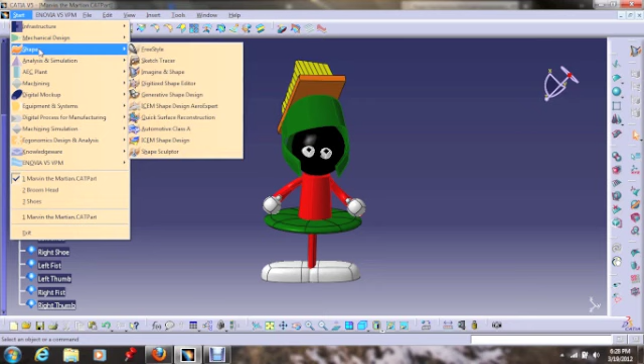We're going to start by first modeling the torso. So we're going to open a new Imagine and Shape workbench under Shape, then Imagine and Shape. We're going to call this the torso because that's what we're going to start with first.

Now Marvin's torso we're going to model as a tapered cylinder. We can do that by first inserting a cylinder, which is found under the Sphere toolbench, and it's the second option.

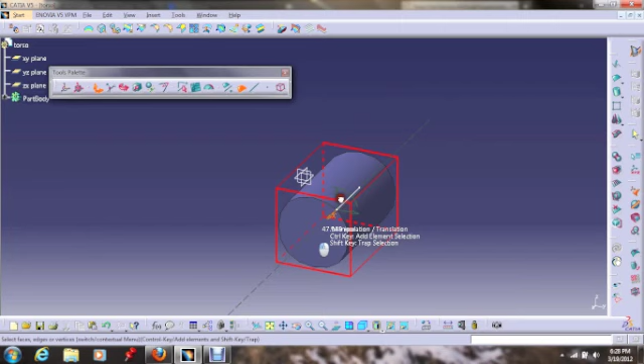Now when CATIA adds something, it automatically selects all the surfaces for us, so we can translate it by simply clicking on the axis, moving it left and right, forward and back, and even up and down. We can also do this with just one plane as well by clicking on the plane tool, double-clicking on which plane we want to move, and we can move it this way as well.

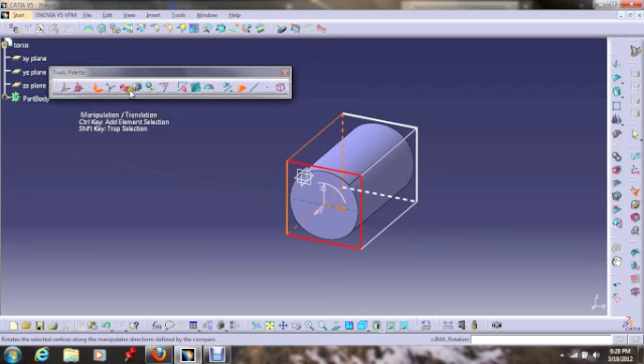We're going to leave it in its cylindrical shape. We're going to rotate it first. As you can see, I never selected all the surfaces, so we're just going to end up rotating that plane. However, if we go back and click this toolbar, it now has everything selected for us, and we can rotate the entire cylinder.

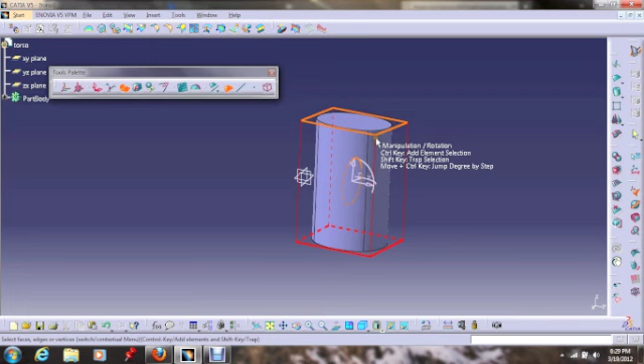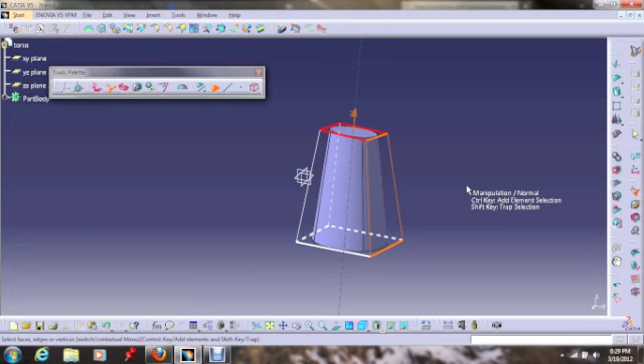We want to make it tapered, so we're going to click the local normals button, double click the top, and if we pull it up, it's going to open up the top face, and it'll close it up if we pull the z-axis down. So we want to make it just slightly tapered.

So about there's fine. We're going to click the spacebar in order to get out of this tool bench. Next, we are going to subdivide the top face, so make different surfaces which we can work with. To do that, we are going to click the face subdivision toolbox, which is the sphere with just the red outline box.

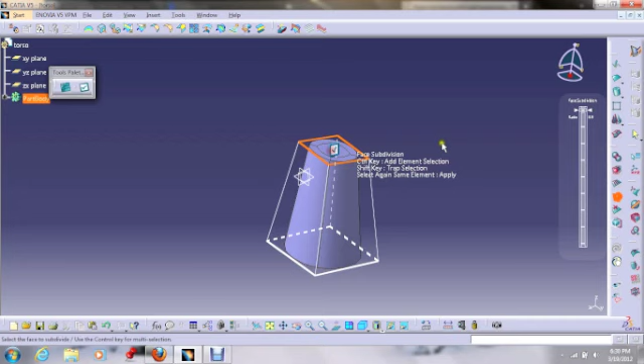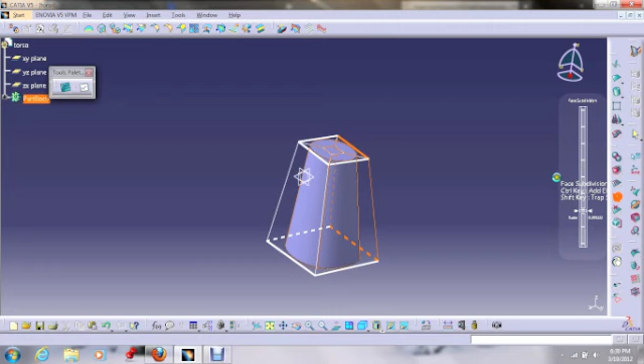Now we click the top face, and with the slider right here, if we slide it all the way down to the bottom, we have a very small face. If we slide it up to the top, we have a larger face. We want something right at about 1/4. Click the check mark to accept. If you don't click the check mark, you won't accept the changes that are made. Click the spacebar twice to get out.

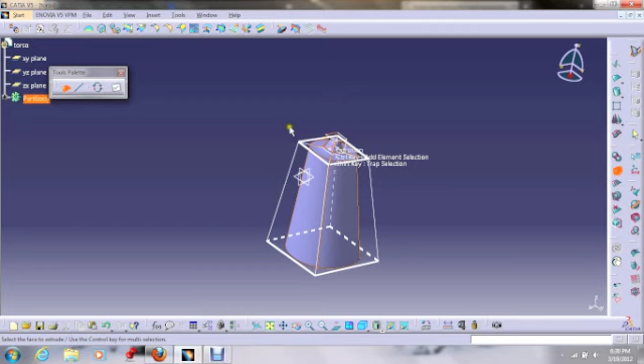Next, we are going to extrude his neck so we have something which the head can sit on. To do that, we are going to click the extrusion toolbar. Click the top face and click the inner surface which we want to pull up. Click the check mark to accept. Spacebar to get out of it.

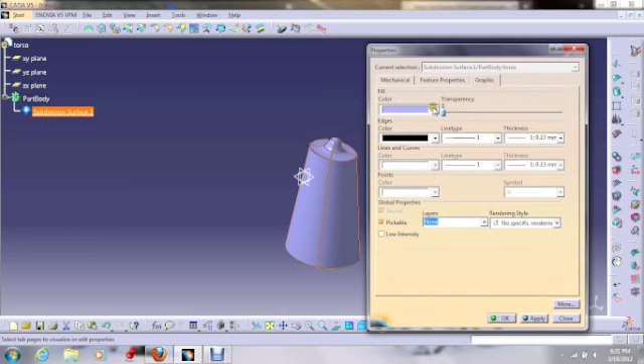Now if you open up your tree, Subdivision Surface 1 isn't very descriptive. So we're going to rename it, right click, Properties. We're going to call this the torso. If we go under Graphic, we can change its color. Since Marvin wears a red shirt, we're going to change the color and the edges to red. Apply, OK, and there we go.

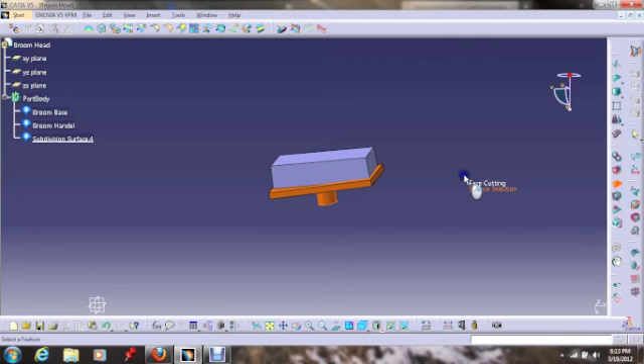We have the torso. Alright, so now we're going to model his broom head, starting from what we have here. Mostly just going to modify this gray block. So the bristles on top are obviously not a solid block.

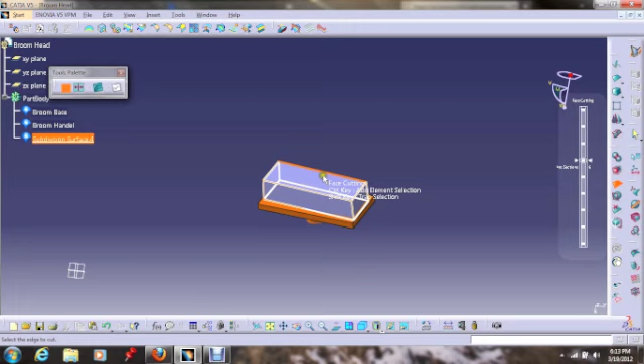So starting with this, we're going to click this tool over here, which was the face cutting tool, and then click the block, moving it around a little bit till we see the top face. You come over here and we're going to have it cut into 6 sections, and if we click along this edge, it will cut it along that edge, and click the check mark to accept.

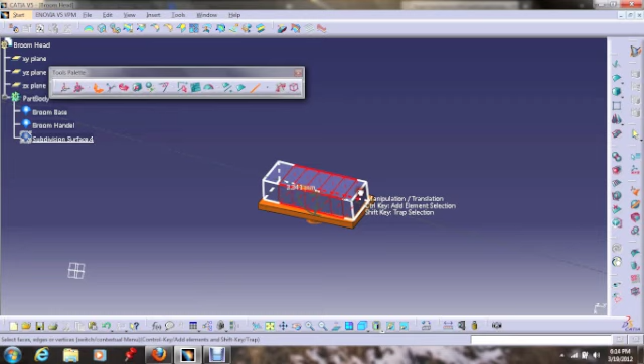Now we're going to hit the space bar once to get back into the normal tools palette. We'll click the line tool and translate these individual lines up and down, offsetting them to form the bristles. So we click every other line, then use the Z-axis, and you get a nice jagged edge.

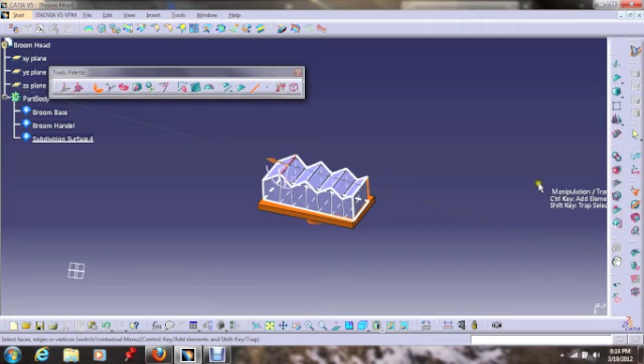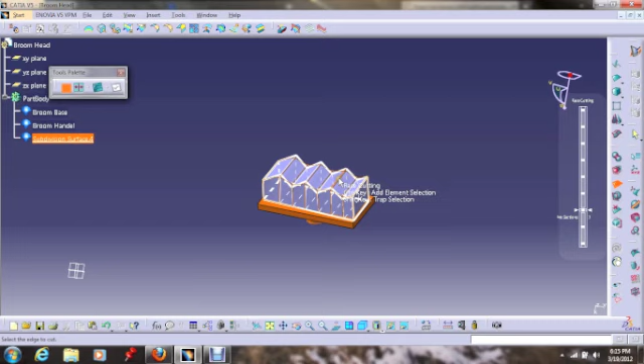You can also do it in the other direction. Come back over to the face cutting tool, click it, and choose sections again — maybe fewer this time, say 3 sections, to see it more easily. If you click a different edge than last time, a perpendicular one, it will cut in the perpendicular direction. Then click the check mark again, hit the space bar, and do the same thing.

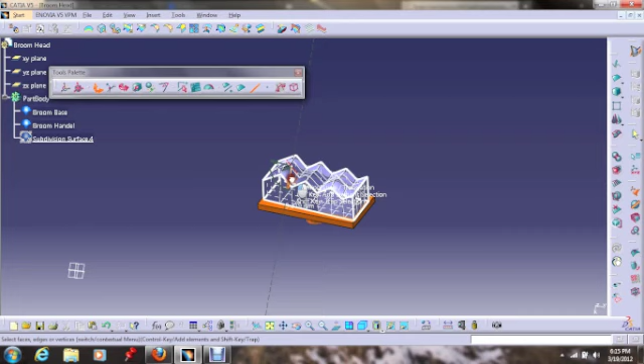Now we can translate each of these other lines individually, and eventually you get a perfectly imperfect section for the bristles. Hit the space bar only once, and we're going to come over here and rename and color the bristles — over to feature properties.

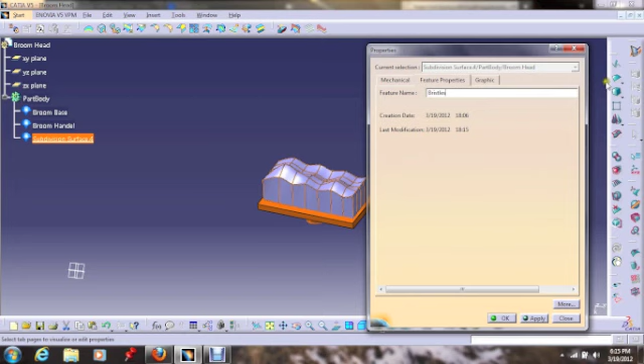Hopefully I spelled that right — probably not. We'll set it into graphic and make them yellow, and leave the edges black so that it contrasts and actually looks like bristles.

The last part we are going to model is Marvin's shoes, and to do that we are going to start with a sphere.

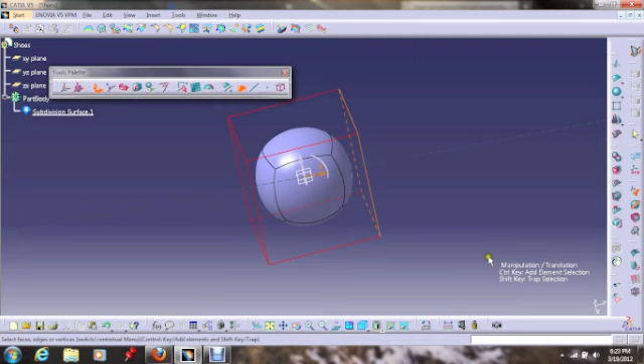We are going to subdivide one of the faces by going back into face subdivision, and we'll set it all the way at the top to give us this nice bullet-like shape. Click the check mark to accept the changes, then hit the space bar twice to get out of it.

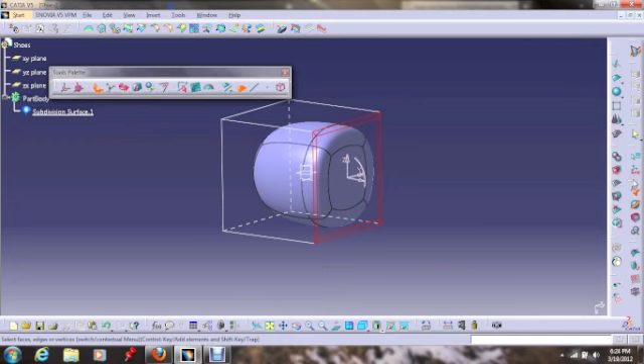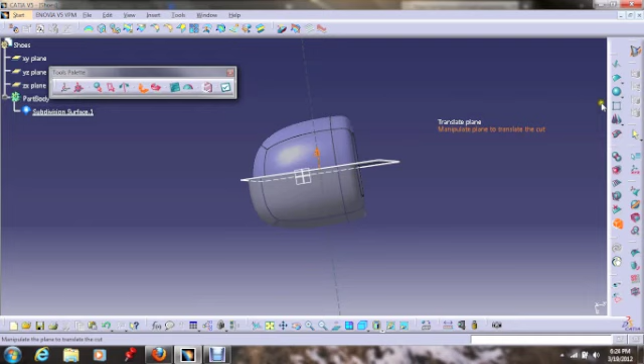Next, we have to cut it in half so he has a flat bottom. We go into the Cut by Plane tool, and here we can see the shoe is nicely cut in half. Now CATIA is going to remove this almost translucent part, so we click the check mark to accept, then hit the space bar, and now we need to rotate it.

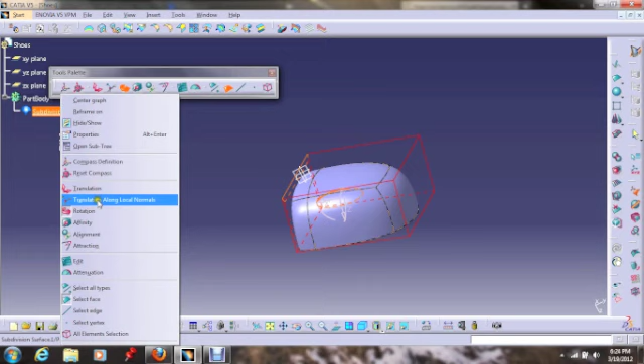We're going to click the rotate tool, and there is one of his shoes. We'll go in and call this his left shoe, and we're also going to make it white and leave the edges black.

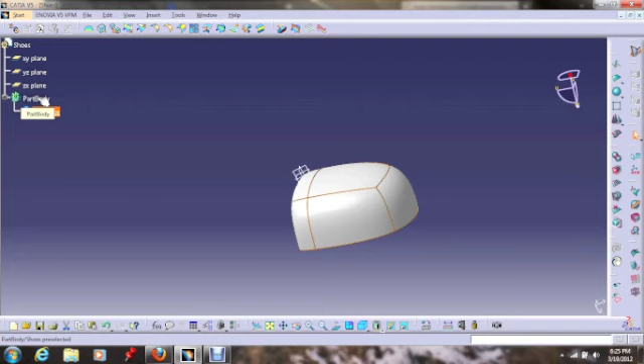Now, to make his right shoe, we're going to simply copy and paste. We right click on left shoe, copy, then right click on part body, paste — now it's on top of itself, so you can't see that it's actually done this. So before we do anything else, we'll go in and rename one of the left shoes to be right shoe.

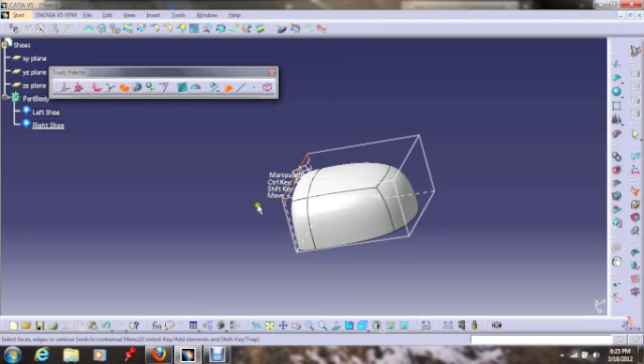If we double click on it, it will bring up our tool palette, and we simply want to rotate all of it. Again, to collect all the points, we use this tool right here, and we find the plane in which we want to rotate it about.

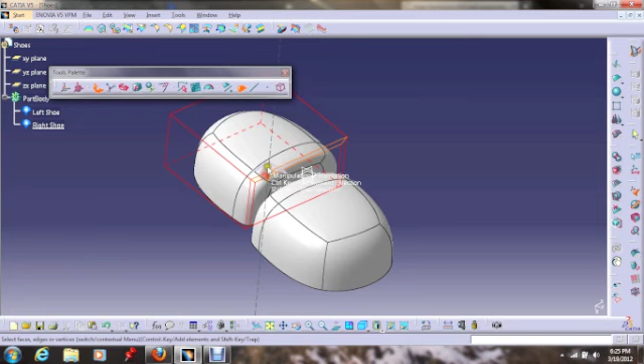Next, translate — we can move it back a little bit so they line up just perfectly. And there you have Marvin the Martian's shoes.

Alright, another shape you would find useful for creating Marvin the Martian is the torus — essentially a little donut that CATIA gives you. You can do the same things with it that you did with the other shapes: translate it, and rotate the different faces, points, and lines.

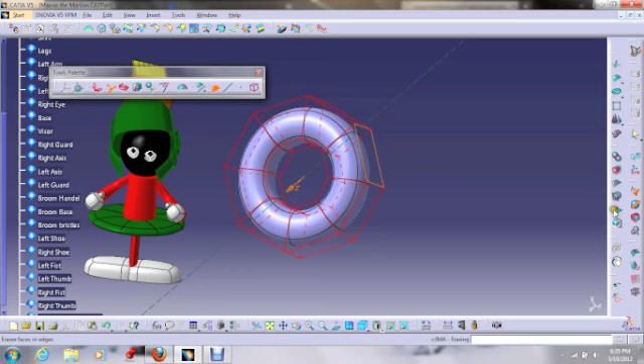The final tool you'll need is this erasing tool — it's a little plane with an X on it, looking just like you're trying to delete something. You'd pick the face you want to delete, then the check mark, and continue with each subsequent face you want to get rid of. So these are all of the basic tools you will need for creating anything in Imagine and Shape.